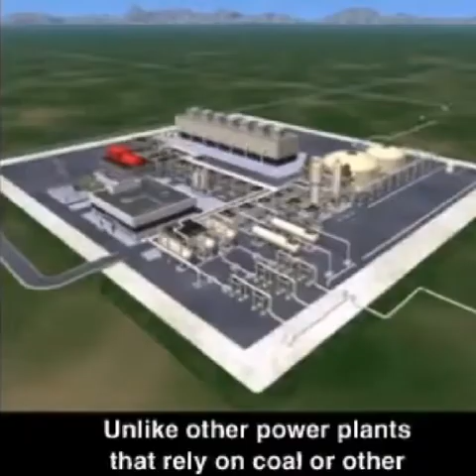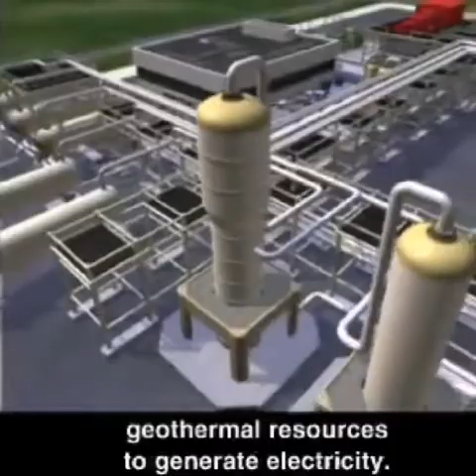Unlike other power plants that rely on coal or other fossil fuels to create electricity for homes and businesses, geothermal power plants use superheated fluids from the Earth's geothermal resources to generate electricity.

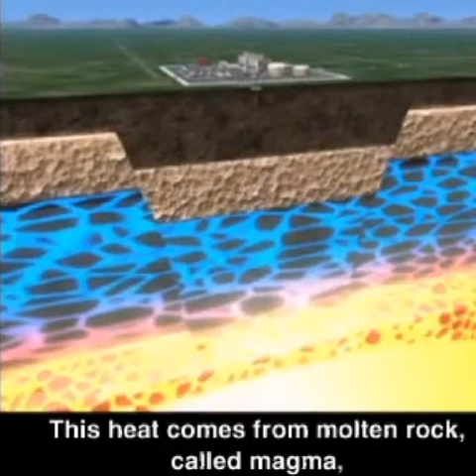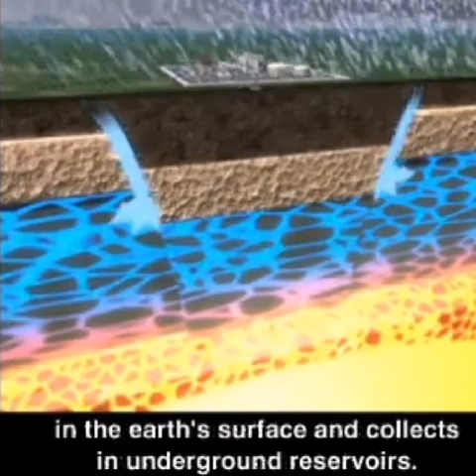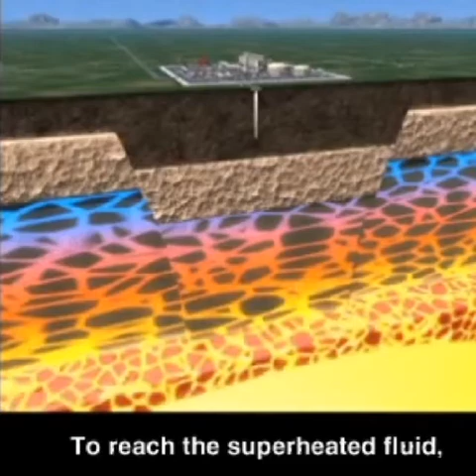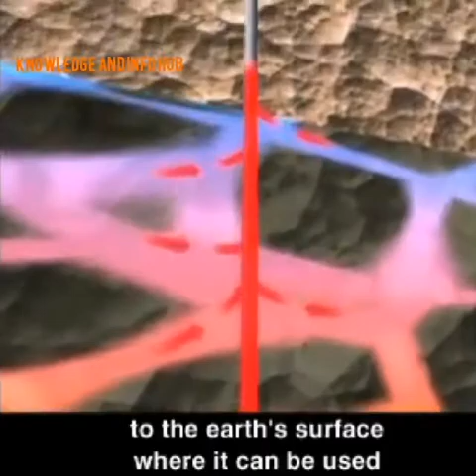To reach the superheated fluid, wells are drilled 5,000 to 10,000 feet below the surface of the Earth. These wells, called production wells, bring the superheated fluid to the Earth's surface, where it can be used to generate electricity for homes and businesses.

This geothermal power plant uses crystallizer reactor clarifier technology, a process that turns the geothermal superheated fluid into steam while removing solids from it. The steam is used to drive a turbine and generate electricity. All remaining geothermal fluids are injected back into the reservoir for reuse.

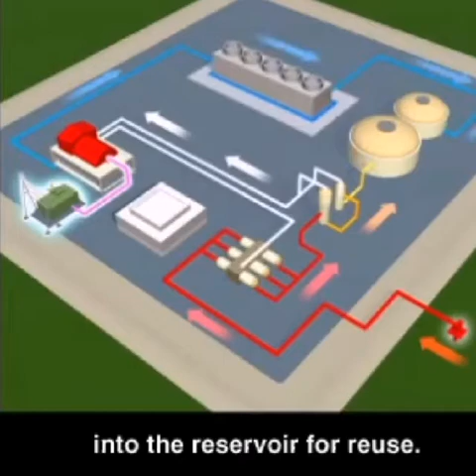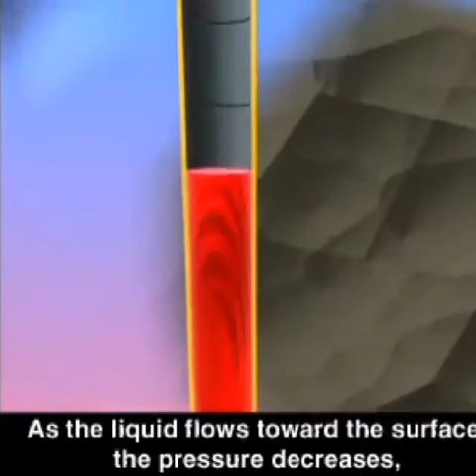Under its own pressure, superheated fluid from the geothermal resource flows naturally to the surface through production wells. As the liquid flows toward the surface, the pressure decreases, causing a small portion of the fluid still within the well to separate or flash into steam.

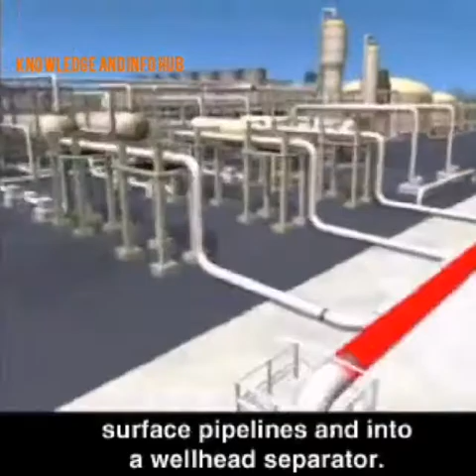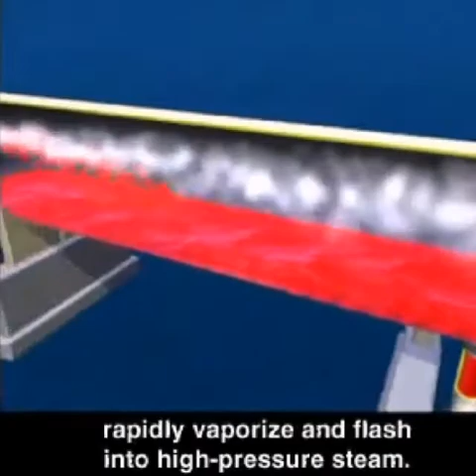At the surface, the superheated fluid and steam mixture flows through surface pipelines and into a wellhead separator. Inside the separator, the pressure of the superheated fluid is reduced. This causes a large amount of the superheated fluid to rapidly vaporize and flash into high-pressure steam.

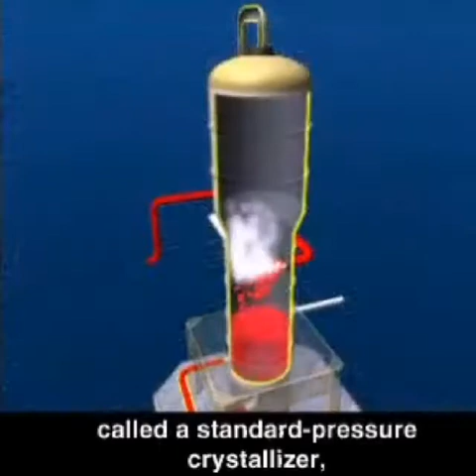The geothermal fluid that is not flashed into steam in the wellhead separator flows to a second vessel called a standard pressure crystallizer, where an additional amount of standard pressure steam is produced.

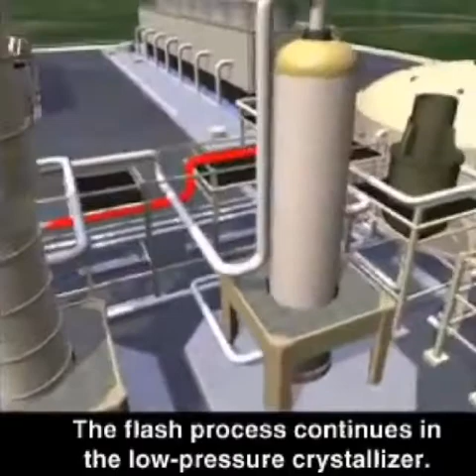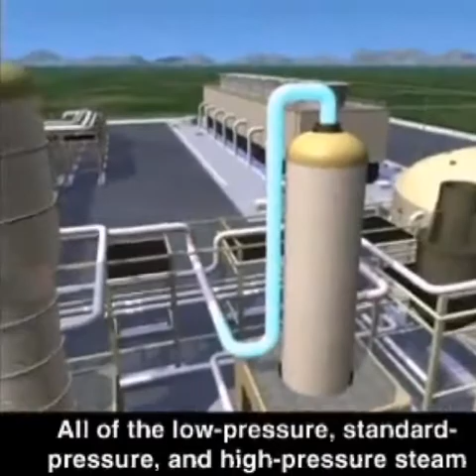The flash process continues in the low-pressure crystallizer. The remaining fluid is again flashed, this time at a lower pressure to produce low-pressure steam. All of the low-pressure, standard pressure, and high-pressure steam is delivered to a turbine.

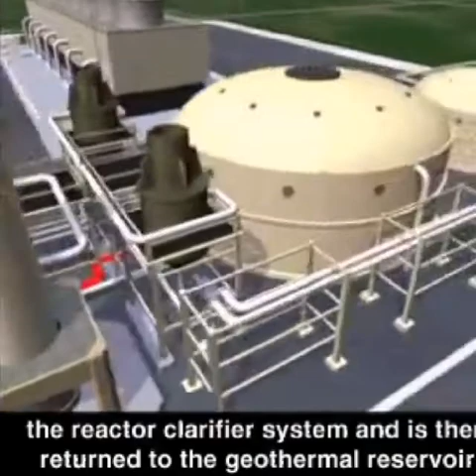The fluid that is not flashed into steam flows into the reactor clarifier system and is then returned to the geothermal reservoir through injection wells.

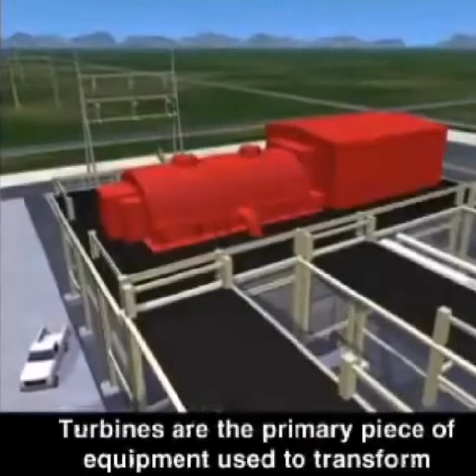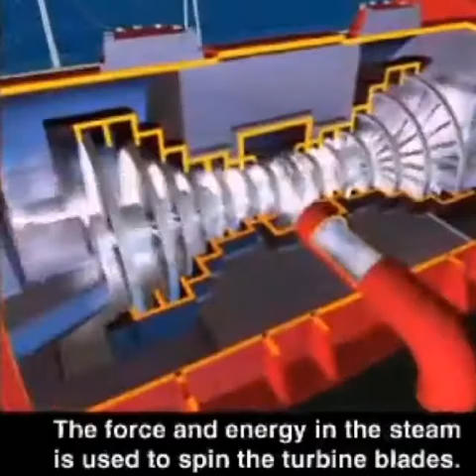Turbines are the primary piece of equipment used to transform geothermal energy into mechanical energy. Pressurized steam created from the geothermal superheated fluid flows through pipelines to large steam turbines. The force and energy in the steam is used to spin the turbine blades.

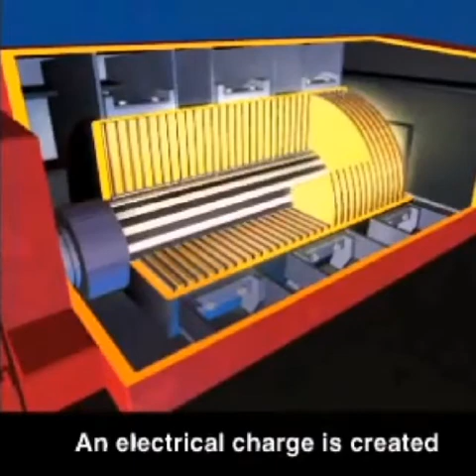The turbines turn a shaft directly connected to an electrical generator. An electrical charge is created when magnets rotate within the generator. Large copper bars carry the electrical charge to a step-up transformer outside the plant. Within the transformer, the voltage is increased before the power is sent to the power lines that carry it to homes and businesses.

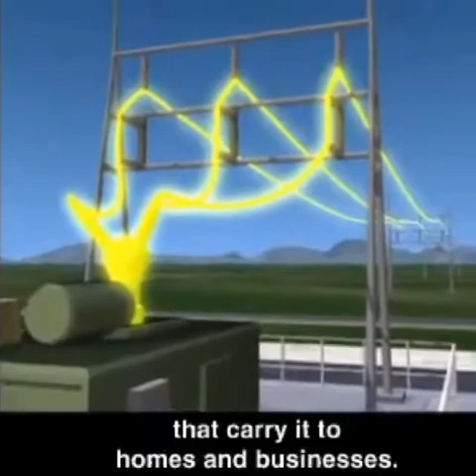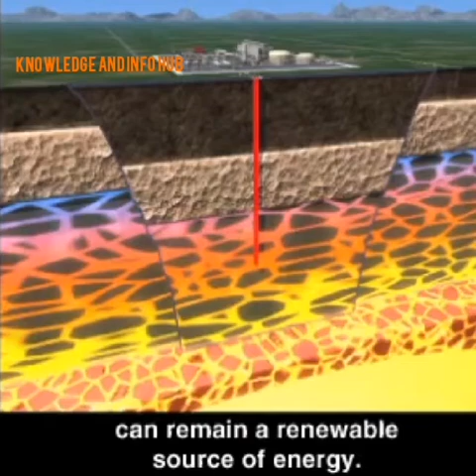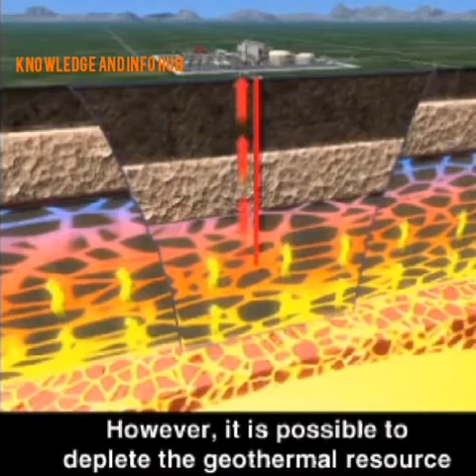Geothermal energy is a sustainable resource because with proper management, a geothermal resource can remain a renewable source of energy. Water trapped deep within the Earth will naturally replace the superheated fluid that is drawn from the geothermal resource through surface wells. However, it is possible to deplete the geothermal resource by removing fluid faster than it can be naturally replaced.

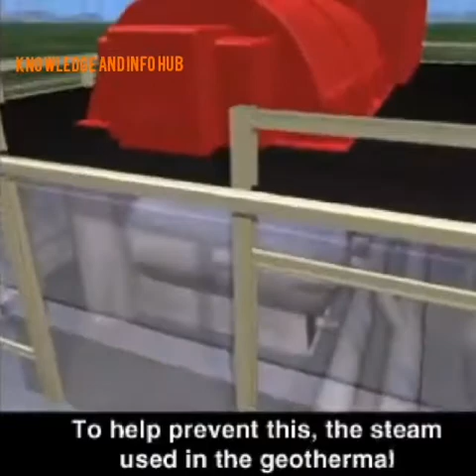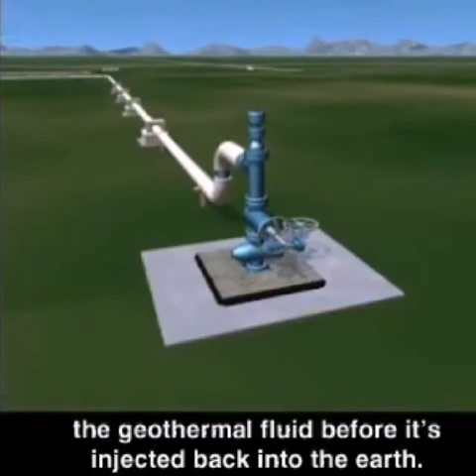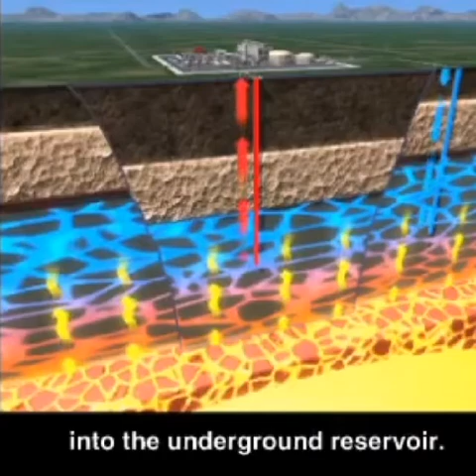To help prevent this, the steam used in the geothermal power plant passes through a condenser that turns it back into fluid. At this stage, it's possible to recover minerals from the geothermal fluid before it's injected back into the Earth. This condensed fluid, along with the fluid that did not flash to steam, is injected back into the underground reservoir. Magma naturally reheats the fluid so it can be used again.